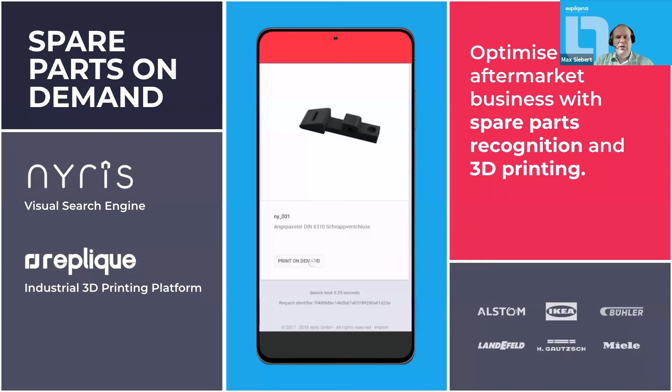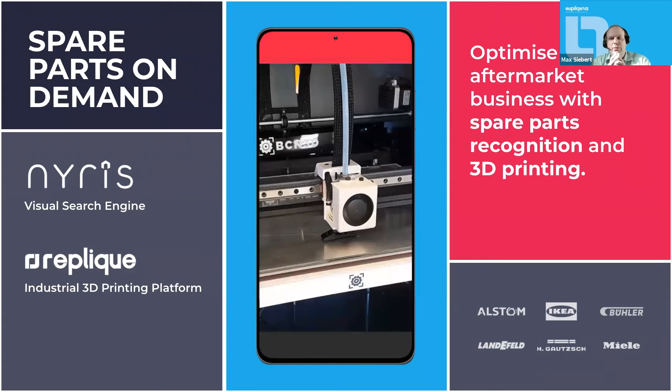This is how to optimize your aftermarket business with AI-integrated recognition and production on demand using 3D printing. Nyris and Replique share the same vision. We want to make your after sales business easy, successful, and provide your customers a wonderful user experience. We both recognize that if we combine our competencies, which we will show you in a minute, we can offer a unique service to every OEM dealing with spare parts.

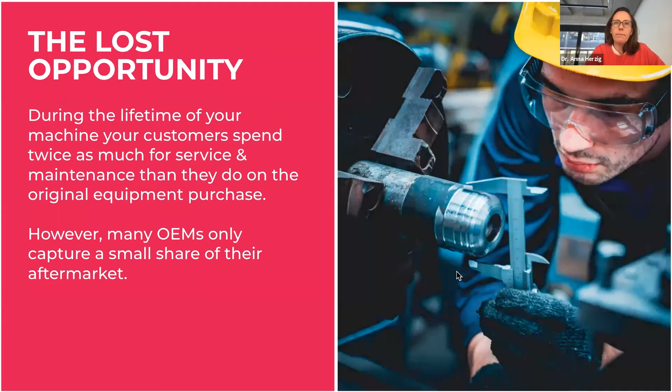So what's the issue? Very often the after-sales journey starts with a spare part that needs to be identified and replaced. Technicians expect a great customer experience here, same as they know from their private life when ordering online. And availability is the most critical purchasing criteria for them. Still, that's the number one.

However, keeping all parts on stock and available for fast delivery is very costly. So using standard production methods, only a few parts qualify for make to order. The rest you have to make to stock, which increases again the inventory costs. So let's deep dive a little bit into the problem and the value chain.

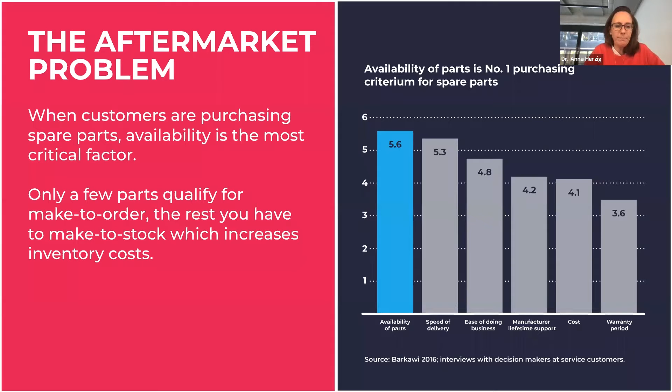All right. So let's just imagine you have more or less in your factory or in your site a machine, and this machine breaks. So what do you typically do when something breaks? You either try to fix it yourself or you call a technician. And most industrial machines have a myriad of spare parts, so it is hard to find the right spare parts.

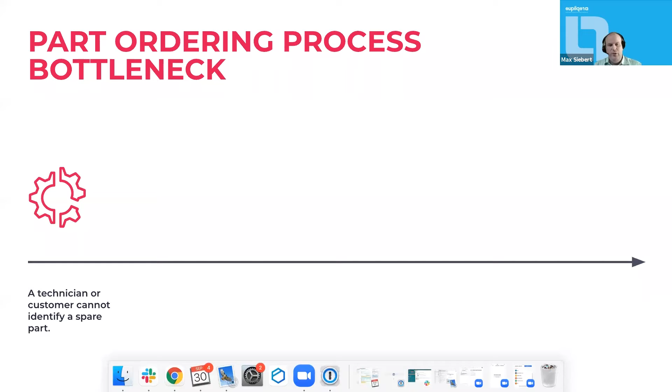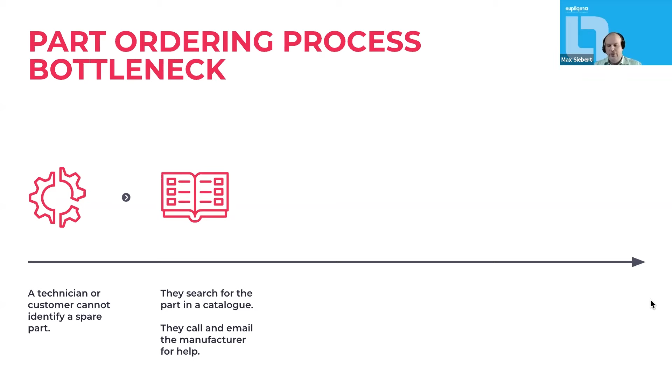So typically what you or the technician tries to do is find the right spare parts, either in a catalog. But at some point in time, no matter if you or the technician does it, you typically end up calling the help line and the back office, in both cases trying to ask for help.

So that takes time, and typically, guess what? Nobody likes to be in the queue on the phone. So the support team does the best they can, and they identify the part, but eventually they find out it's not in stock.

Obviously, if you insist on purchasing it, rebuying the machine is not an option - training cost, delivery time, plus the purchasing cost is way too high. So the support team will now try to get hold of the supplier or distributor to get a part or remanufacture it.

However, it's not that you just order a single part. Typically, an OEM needs to order many parts, which is called minimum order quantity. And finally, after the OEM has received the replacement part, it takes some time, and then it's shipped to your spot and you receive the spare part, which is sometimes rare. The whole process can take up to 1 to 3 months, which is a typical time period we are facing all the time.

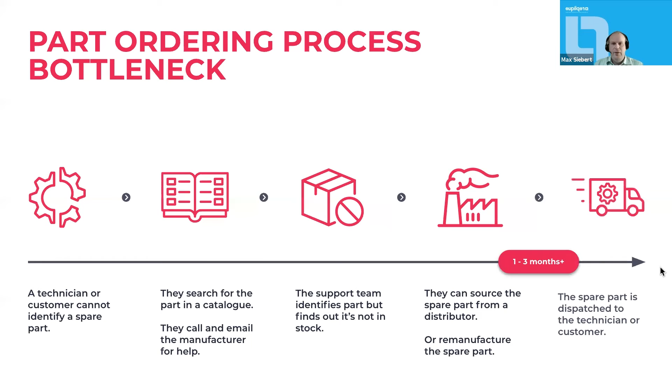So remanufacturing cycles are typically in a time frame of around 100 days. All right, so thank you. So this is now the question: how can we make this easy, enjoyable, but also way more efficient?

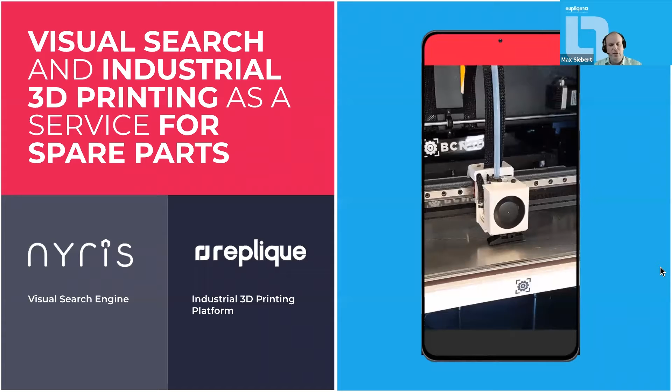People know from their daily business how to use their phones, order and pay, and use it all the time. So we combined our two core competencies and present an answer that reduces the administrative and overhead costs with automated fulfillment service for ordering spare parts on demand. As I was presenting the problem, Anna will now show you the solution.

Yeah, thank you for this, Max. So let's get a closer look at what we propose. Imagine another technician is looking for a part again, and she now just snaps the part using a smartphone and the OEM's purchasing app or mobile website, where the Nyris technology is integrated.

Now she gets the news that the part is no longer in stock, but can be manufactured on demand. So she orders manufacturing on demand. In the backend, the needed information is forwarded to Replique, who start a secure one-time printing process and deliver the part to her. The entire process takes a maximum of a week, and very often significantly less than that.

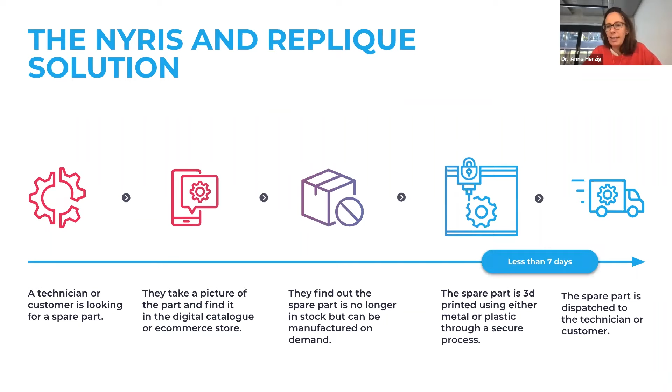So let's talk about the magic of visual search technology a bit. Many ask us, how does that work? Is this really that good, that accurate? Our answer has always been, let's test. We don't know upfront, we don't know your parts, we don't know how they look like. It's always a surprise, but we are always happy to test and do that for free.

So far, we've managed to achieve at least 70% search accuracy for every customer we onboarded so far. And this number can go up to 95% in best cases. That's one of our core USPs - we significantly outperform the competition here. So how do we do that?

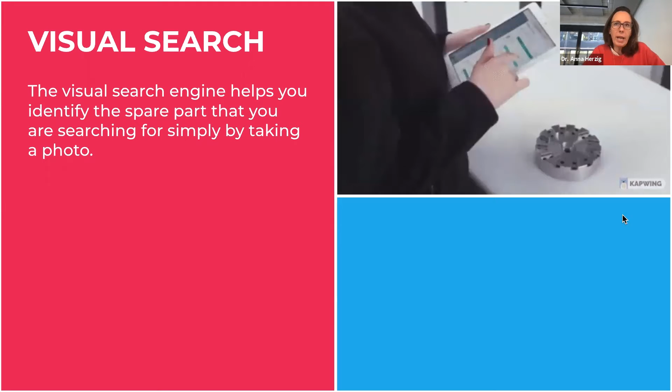So at Nyris, we offer a very unique and highly effective solution. It consists of 4 key steps, starting with the delivery of 3D CAD models. If you got images of your parts, we're happy to use them as well. If you don't, we're happy to use the 3D CAD models, what is very often the case. We render those in a highly automated process and synthetically generate

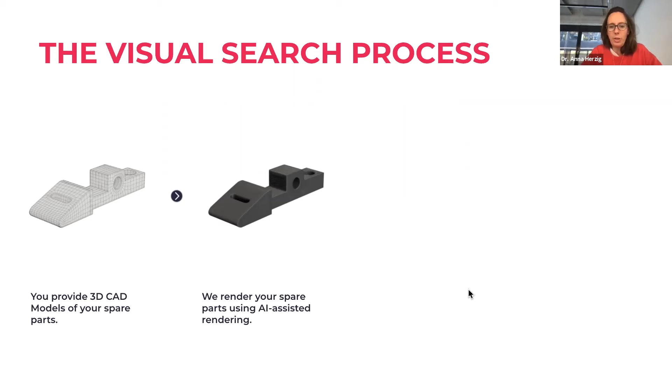pictures out of that, so really synthetic images of that part. And those images we use to feed the search index. Based on this synthetic index, we set up the visual search as software as a service, meaning available 24/7 to answer any request from any Nyris customer. Currently, we answer roughly 20 requests from all over the world every second.

Our business model is license-driven. There are no setup costs, and the software as a service price is of a very high value. Typically, we generate an ROI of 6 to 10 times in the first year after rollout.

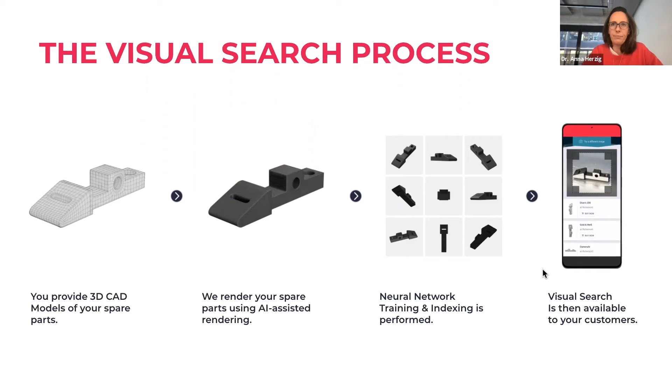And those synthetic data models remove a major bottleneck for adoption of visual search within the industrial domain, and this is a lack of real images, as many of our customers tell us.

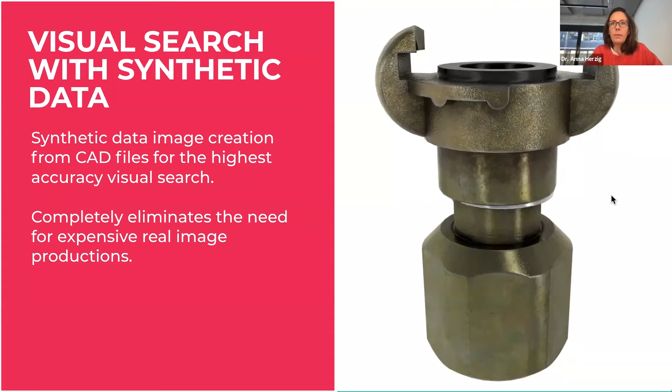So hand over to Max. All right, thank you, Anna. And I always really must admit, I find this magic and amazing what you do, Anna.

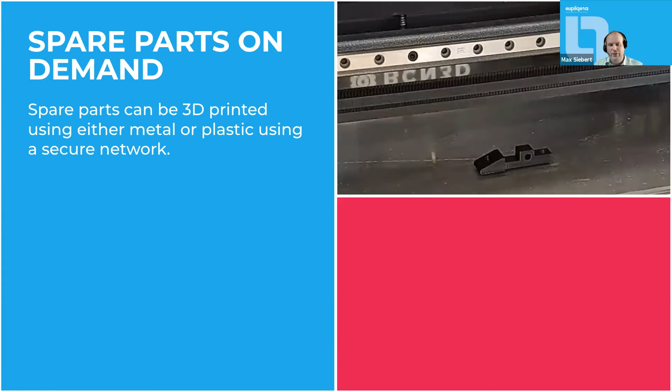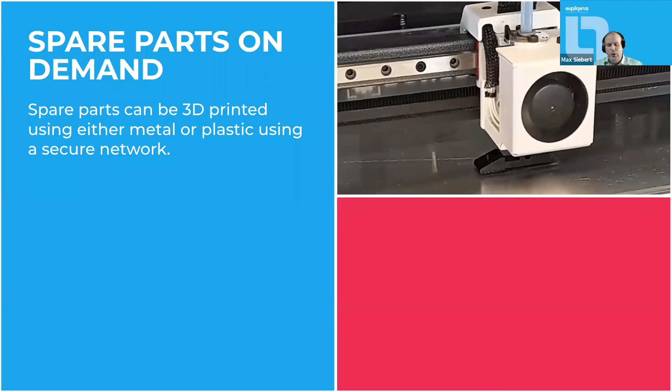Okay, maybe quickly some words about 3D printing. Might happen that you're not familiar with 3D printing, so I'll briefly explain. More or less, it's the third way of manufacturing an object. Typically what you know are either subtractive processes, so you mill something out of a large block of material with lots of waste, or you have a so-called formative method, where you melt up material and cast it into a form, either metal or polymer.

And here with 3D printing, as you can see in the image, you build an object layer by layer with different technologies. There are multiple 3D printing technologies, each specialized to certain materials, but the principle is always the same. You always build up objects by layer, with no installation of special part-specific equipment. And by the way, since we're often asked this, you can print metal too. Stainless steel or aluminum, for example, are typical metal applications which are being printed.

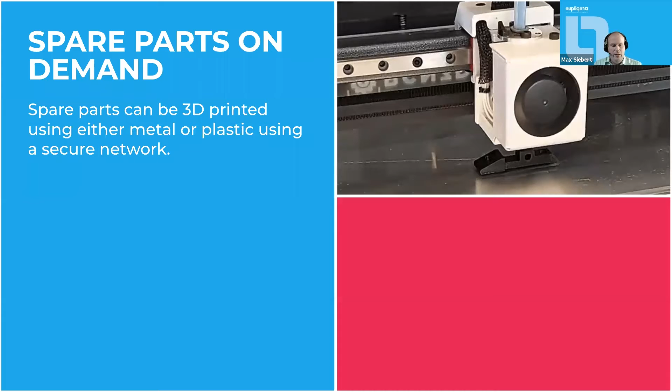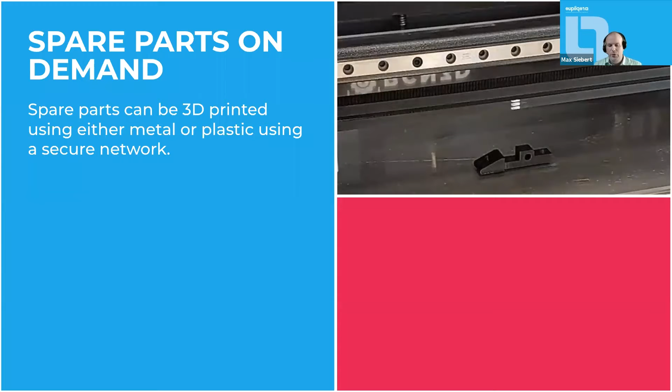And this is more or less how we work. The part which Anna just identified is linked in the secure digital warehouse provided. The manufacturing methods and the suitable printer for exactly these parts are also known and automatically found near the order location. So once an order comes in, it's released to a trusted partner in our network with exact control on conditions and number of printouts.

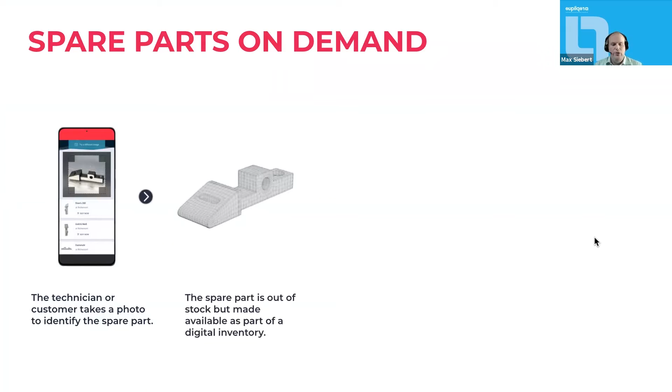and packed in a way that's demanded by the OEM. So here what you see is the workflow end to end. You just need a mobile phone for your technicians or for your customers, and then the part can be easily identified.

And once it's made available in the digital inventory, the part can then be printed by the trusted providers, and subsequently it can be either shipped to you or directly to the customer place in a package which you have specified in advance. So for example, if you're an OEM, you might want to have your OEM sign on this, or maybe a serial number. And that's what we think will change the way you do after-service significantly.

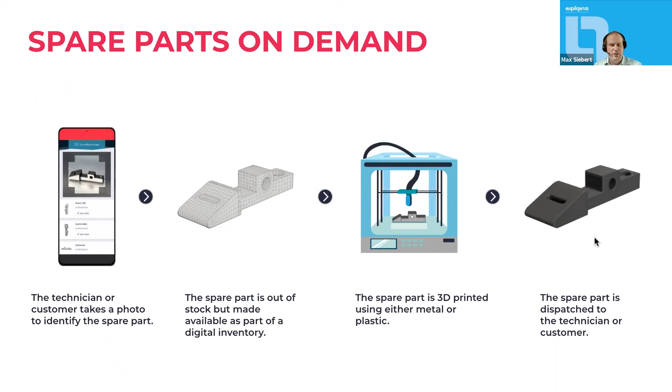And hereby, I would like to hand back to Anna. Thank you, Max. So what kind of OEM benefits, the benefits for you as a manufacturing, machine manufacturer, do we see?

First of all, we see the reduction of storage costs. On average, to store a spare part, or any kind of products, costs roughly 30% of the value. This is exactly the number we can reduce significantly, because you don't need to store the parts anymore. We estimate that already today there's a minimum of 7% of all parts in stock that can easily be 3D printed. This number can be significantly larger depending on the material and style of your parts.

Secondly, providing an excellent customer experience increases your after sales. In A/B testing with our industrial customers, we could show an uplift of up to 25%, which is an amazing value. And last, we significantly decreased transportation distances by roughly up to 70%. That's our brief estimation on that, due to the wide network of 3D printing facilities.

So we have another list of benefits, and those are the benefits for your customers, for the people who use the machinery, for those technicians who are maintaining and servicing the machines. First of all, we provide an excellent customer experience that leaves a wow feeling of getting things done very fast and very efficiently. Secondly, they get the parts up to 75% faster. And third, they can extend the machine lifetime, which is a very important value for them.

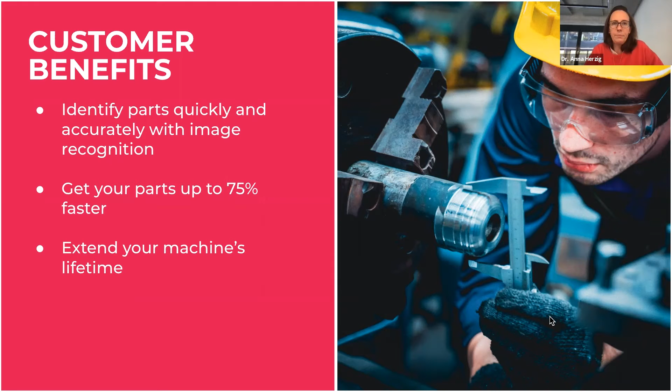So yeah, why not start today? Max and I have a special webinar offer today. We offer you the chance to experience Nyris and Replique's spare part service. Please send us up to 100 CAD files, and we will set up the service and grant you access to the portal where you can experience visual search for all of the 100 parts. And you can order up to 3 printed parts free of charge.